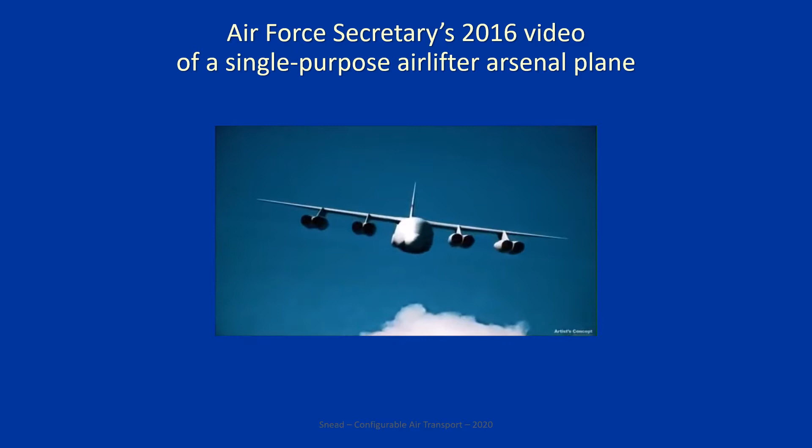In 2016, the Air Force Secretary discussed the use of an Arsenal plane to increase the Air Force's warfighting capability. While this was originally expected to be a modified existing airframe, a clean sheet design is now being considered. The CAT concept provides the ability for true Arsenal plane capabilities along with many other important peacetime and warfighting capabilities.

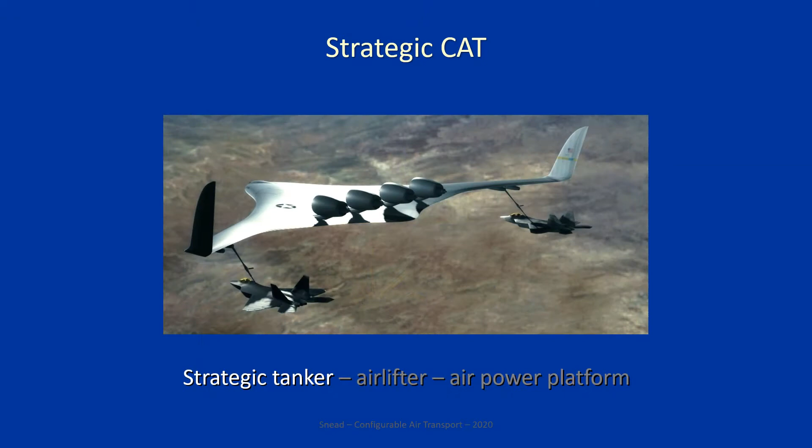The CAT concept involves three aircraft: a strategic CAT, a theater CAT, and a tactical CAT. The strategic CAT is a tanker in the class of the KC-10. Able to carry up to 3 cargo modules, each the size of a C-130 fuselage, it also is an airlifter that can also refuel other aircraft at the same time. Finally, with specialized modules, strategic CATs can perform a variety of airborne military missions.

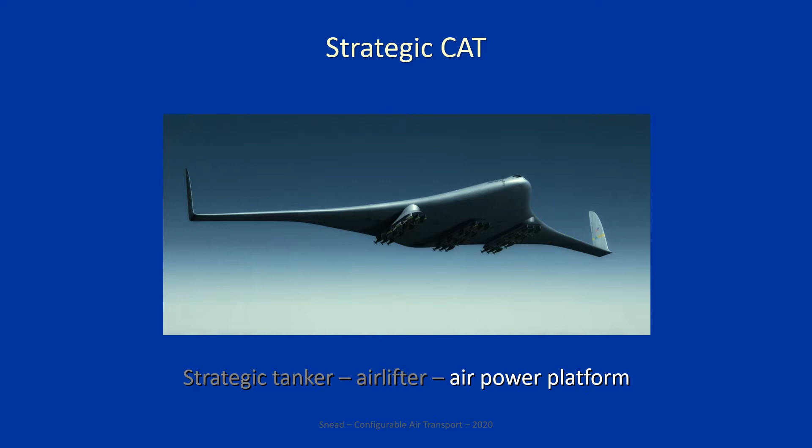The smaller theater CAT is also a tanker, in the class of the KC-46. It can carry 1 cargo module. And, like the strategic CAT, it can also carry the same specialized air power modules. The final concept is a large, tactical tilt rotor, capable of carrying the same modules.

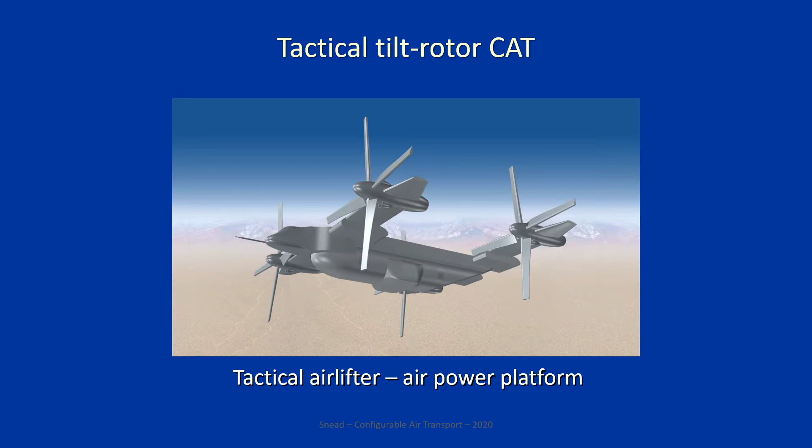The following 12-minute video, created in 2006, provides an overview of the design and capabilities of the strategic and theater CAT concepts.

The nature of modern warfare is constantly changing, and air mobility continues to grow in importance, providing critical deployment, sustainment, and other operational support for the U.S. and its allies. Air mobility modernization began with the acquisition of the C-17 and continues with the C-5M, the C-130J, and the C-130 AMP programs.

Now, the Air Force looks to modernize its air refueling capability, currently provided by a fleet of over 400 KC-135s. In the 1950s, the Air Force took a conservative approach to expanding its air refueling capability by modifying commercial aircraft into air refuelers. We have learned much about air mobility capabilities and needs over the past 50 years.

As the Air Force looks to update the capability currently provided by the KC-135 fleet, now is the time to explore the full spectrum of possible solutions that could provide effective and flexible air refueling and airlift well into the 21st century. The Configurable Air Transport, or CAT, is such a concept.

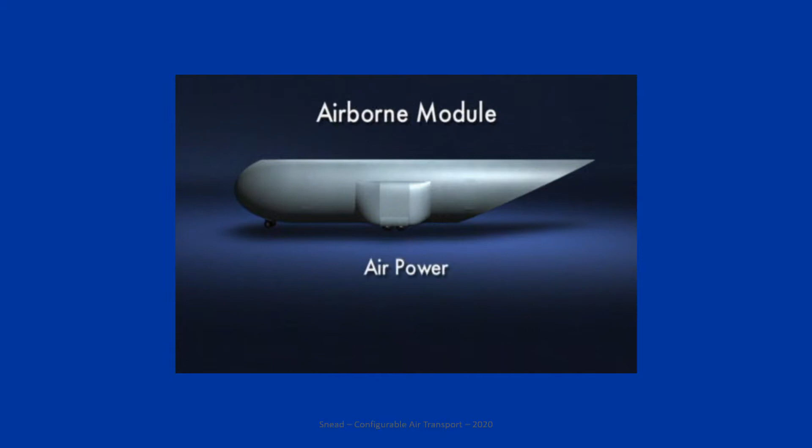The key to the success of modern shipping networks has been the standardized intermodal container and the vehicles that were designed to carry them. And this same success could be realized in today's military airlift through the use of airborne modules, enabling fast, secure, and efficient transport of cargo, vehicles, and personnel, as well as their possible use in a wide range of other air power and airborne support missions.

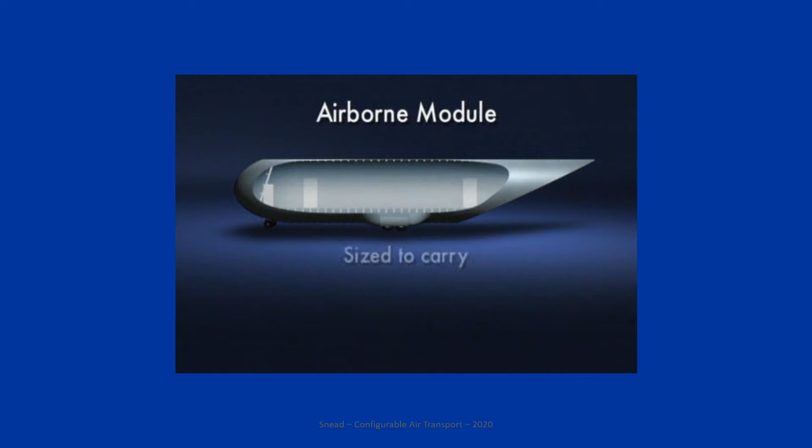Preliminary studies of module and aircraft configurations indicate that a module slightly wider and taller, but about the same length as a C-130 fuselage, could carry most Army air mobile combat vehicles and associated equipment. Specifically, the module will be sized to carry 6 463L pallets, or current and future Army air mobile combat vehicles.

The modules are designed for independent ground mobility on the ramp. The self-height adjustment of the modules enables quick loading from the ground, standard loading docks, and flatbed trucks.

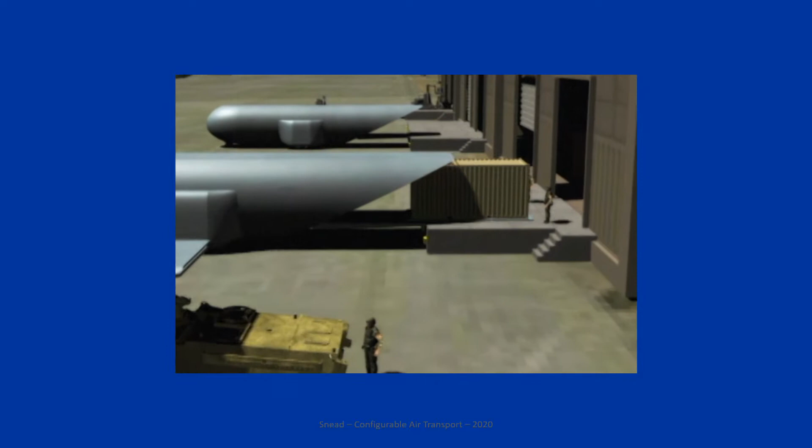Major General Gavin, commander of the Army 82nd Airborne Division during World War II, authored a history of airborne operations that included a look at desirable future capabilities. Recognizing that increasing the value of air mobile operations was closely tied to the capabilities of their air transport vehicles, General Gavin advocated modularized cargo containers and module-carrying aircraft.

This idea was picked up by Fairchild, then building the C-119 theater transport for the Air Force. To see if a module-carrying transport was practical, Fairchild built 2 prototype XC-120s based on the C-119.

In the 1930s, U.S. aircraft designer Jack Northrop pioneered a revolutionary aircraft design called the flying wing. 50 years later, in the 1980s, the Air Force used the flying wing idea to develop the revolutionary B-2 strategic bomber. Now, NASA and AFRL are investigating the next revolution in transport design, a version of the flying wing called the blended wing body, or BWB, that is aerodynamically and structurally more efficient than traditional aircraft designs.

The module-carrying version of the BWB, referred to as the Configurable Air Transport, or CAT, provides a highly versatile, time-resilient solution with the capability to provide strategic air refueling, global reach air cargo transport, global reach air power projection, and persistent airborne surveillance.

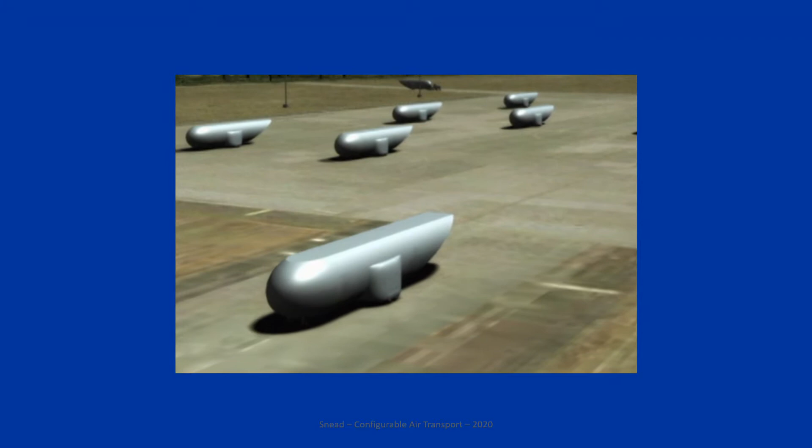The United States Transportation Command, working with the Air Force Air Mobility Command, would plan the air bridge to efficiently move the Army brigade to forward air bases. As the modules would have already been checked to ensure the cargo is properly secured and within allowable limits of weight and balance, they could be moved directly to the ramp for pickup.

Air Mobility Command strategic CATs would arrive, refuel if necessary, pick up the Army modules, and depart for regional or allied air bases near the theater of operations.

On arriving at the regional base, the strategic CATs would taxi to a designated location on the ramp, detach the modules, and depart, all in a matter of minutes. Almost immediately, the modules could be directed into position for pickup by the theater CATs, or parked away from the area of ongoing operations for temporary secure and protected storage until moved forward.

By using cargo modules, the traditional en route unloading, sorting, storage, and reloading of palletized cargo and vehicles would be replaced by the efficient movement of material and vehicles from strategic to theater air mobility systems, shaving hours and possibly even days from traditional deployment timelines.

Further, this use of airborne modules would virtually eliminate en route delays due to MOG constraints, limited material handling equipment or personnel, weather, or a lack of secure temporary cargo storage. Literally within minutes of arrival on the strategic CATs, the Army modules could be on their way to dispersed forward operating bases.

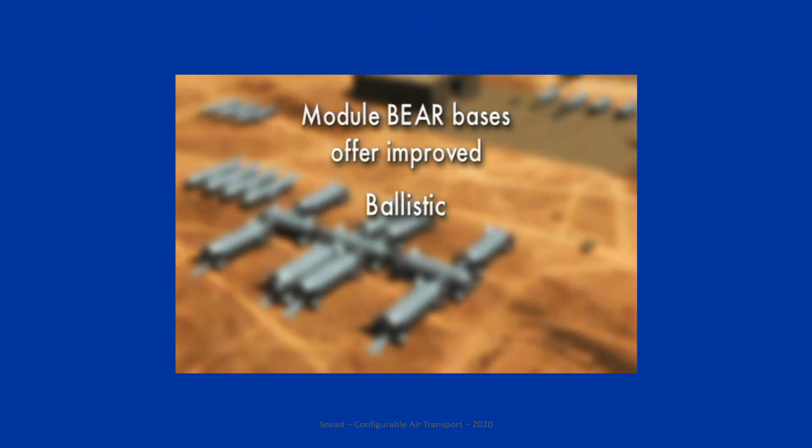Basic Expeditionary Airfield Resources, or BEAR bases, are used to temporarily station expeditionary air forces and disembark mobile land forces. BEAR-based versions of the airborne cargo modules could be used to store, transport, house, power, defend, and sustain the expeditionary forces using air-transportable, environmentally controlled facilities that provide improved ballistic, chemical, and biological protection compared with conventional tent facilities.

In an era of increasing technology utilization at all levels of military operations, BEAR-based modules provide a new means to package, deploy, and sustain high-tech equipped expeditionary forces.

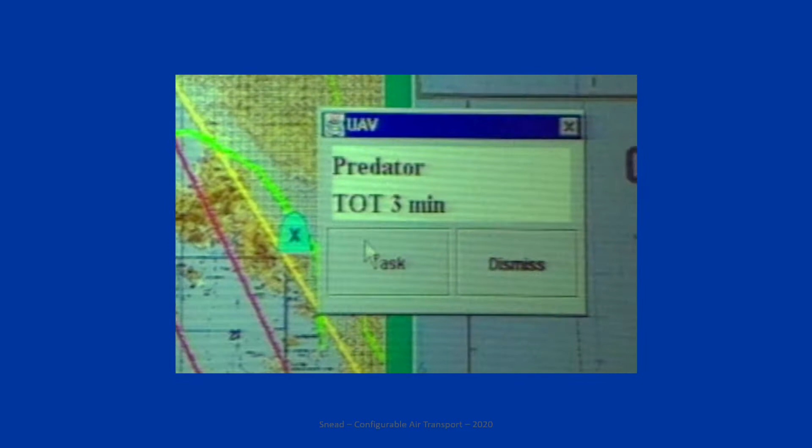For example, hospital modules could provide full emergency diagnostic, surgery, and critical care facilities. Maintenance facilities could provide problem identification and resolution capabilities while being fully electronically linked into reachback supply and expertise networks. Finally, BEAR-based modules could be readily adapted to quickly add new warfighting capabilities such as UAV and near space system control centers and new base defensive capabilities.

As the Air Force considers how best to modernize its air refueling capabilities, technology and design innovation through module-carrying aircraft could establish comparable world-leading air mobility capabilities. This would sustain critical strategic and theater air refueling capabilities and add new airlift capacity and new expeditionary forces, deployment, sustainment, airborne support, and air power projection capabilities.

Almost 40 years ago, the C-5 Galaxy introduced a new era of air mobility. Today, the innovative design application of existing and emerging aeronautical technologies could enable configurable air transports to modernize air mobility to meet the changing needs of the 21st century.

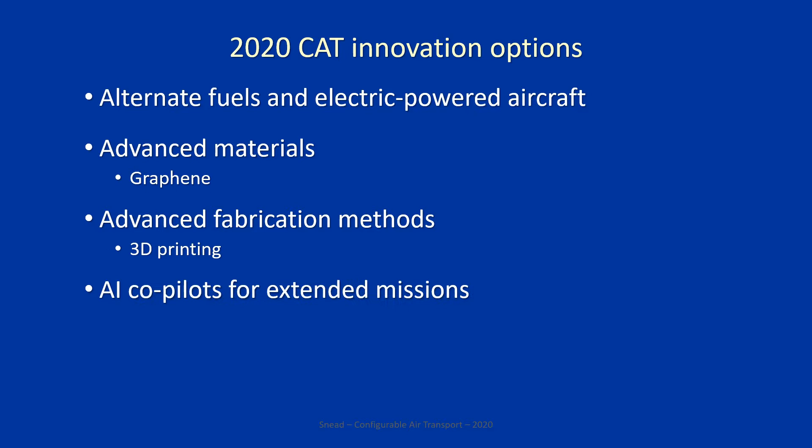Examples include alternative green fuels and electric-powered aircraft, advanced materials such as graphene, advanced manufacturing methods such as 3D printing, and the use of AI for co-piloting and mission execution. These topics are covered in this presentation.

The strategic and theater CATs are tankers. This first part discusses their performance as tankers. The need for tankers arose after World War II. The KC-97, called the Stratofreighter, was one of the Air Force's early tankers.

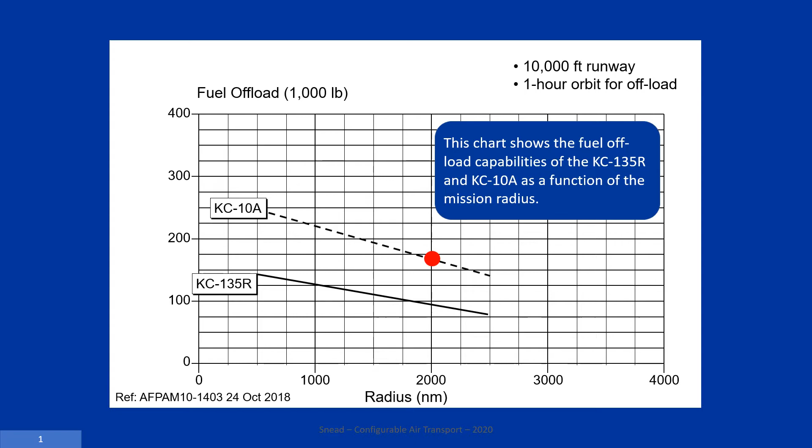The Air Force began a decades-long process of modernizing its tankers in the early 2000s. The strategic and theater CAT concepts could meet the needs of the KC-Y and KC-Z tankers. Please pause this video to examine this chart in detail.

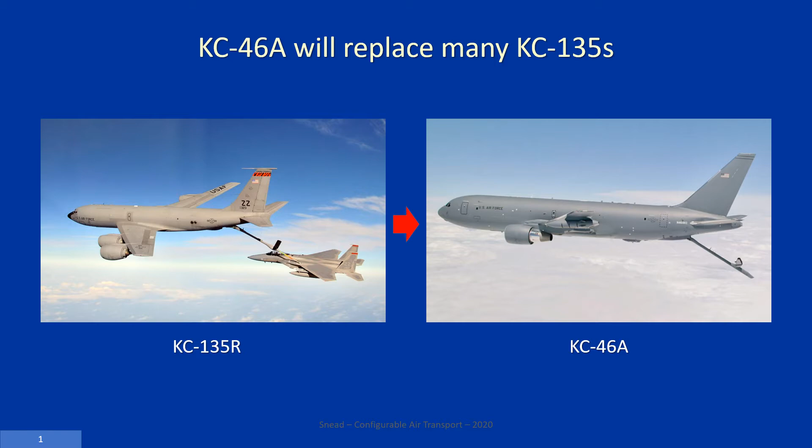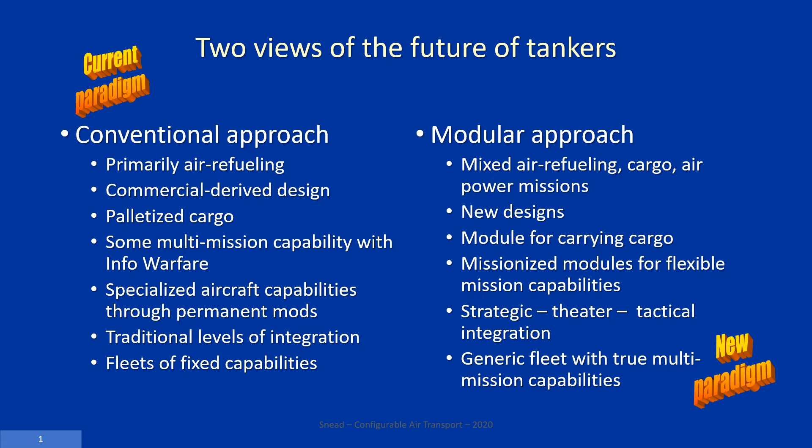According to the Air Force Tanker Modernization Roadmap, the future KC-Y tanker acquisition is intended to replace the retiring KC-10A. Since its first tankers, the Air Force has acquired tankers based on existing aircraft designs, and has followed this paradigm in acquiring the KC-46A. The CAT concept introduces a new modular paradigm, with its strategic and theater tankers having true multi-mission capabilities.

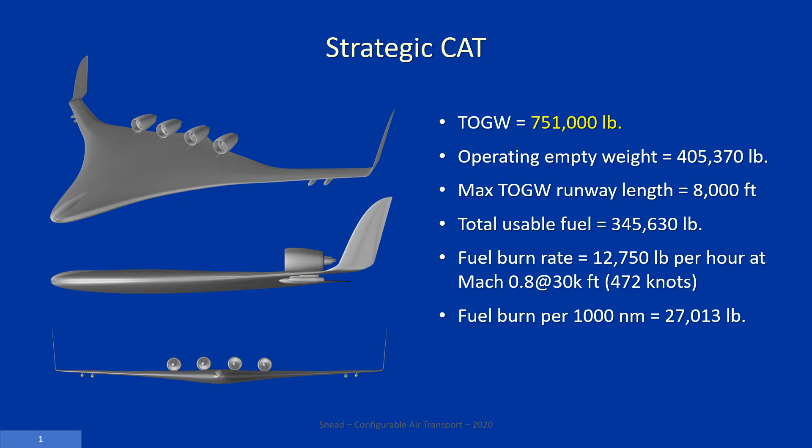The Great Circle distance from Guam to Diego Garcia is 4,500 nautical miles. This distance, with a 600 nautical mile margin, was selected as the sizing point for the strategic CAT. The 600 nautical mile margin represents weather and overflight margins.

These next two charts show the details used in estimating the strategic CAT fuel offload needed for this F-22 ferry mission.

Strategic CATs have the range and offload capacity to support global strategic power projection missions.

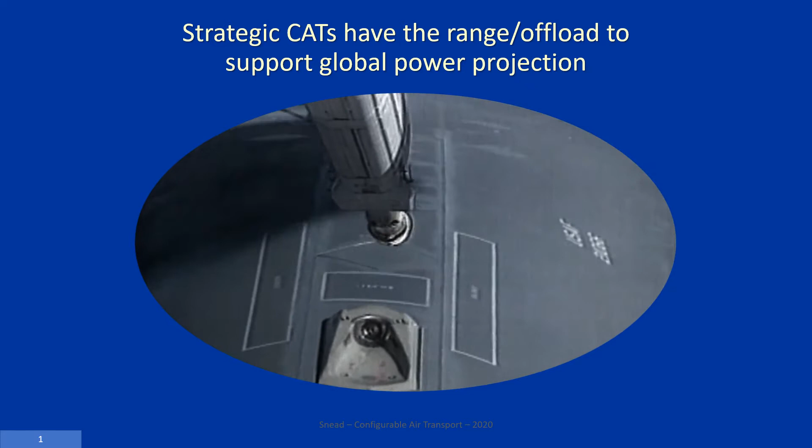Now, let's look at the tanker capabilities of the theater CAT. Here are the tanker characteristics of the sized theater CAT.

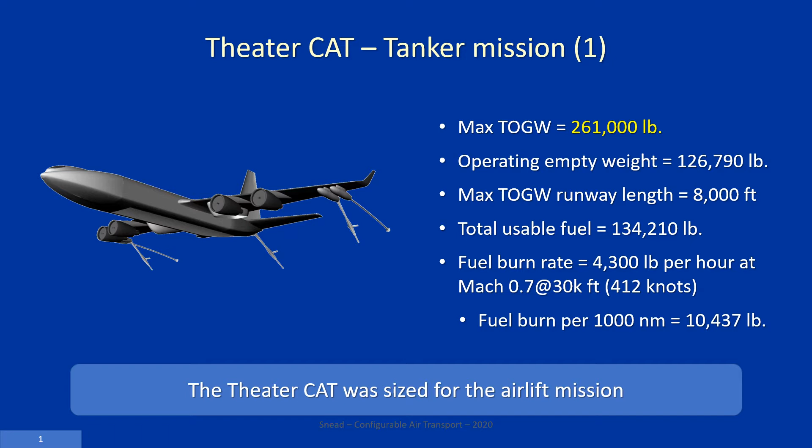Note that the Theater CAT would augment the KC-46A by giving the theater commander a deployable tanker with substantial multi-mission capabilities.

This part discusses the conceptual design of the common cabin used in these two aircraft. To enhance their multi-mission capabilities, both the strategic and theater CATs would be designed for extended airborne missions, perhaps up to 5 days.

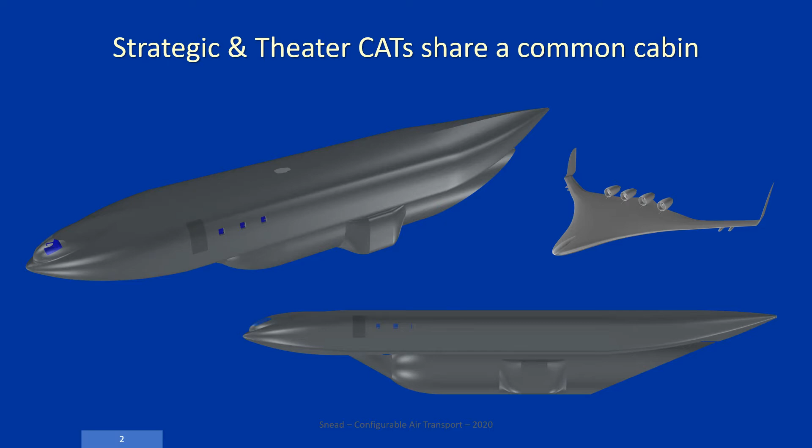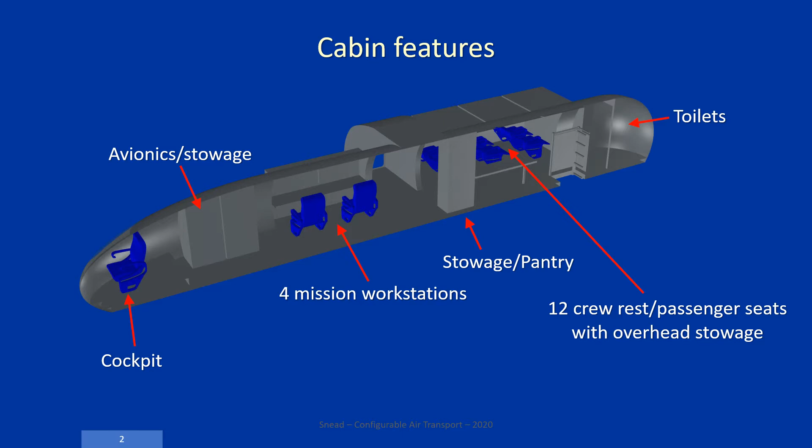The cabins of the two aircraft would likely be similar, if not nearly identical in arrangement. The cabin is designed for 4 mission workstations and 12 passengers. The passenger seats also provide crew rest accommodations for extended missions. Access to the module, being carried by the Theater CAT, is provided at the aft of the cabin.

This part examines the airlift performance of the strategic and theater CATs. In the 1960s, the Air Force adopted a standardized cargo pallet, referred to as a 463L pallet, to improve air cargo transportation efficiencies. Air Force airlift aircraft incorporate provisions to load and restrain these pallets during flight.

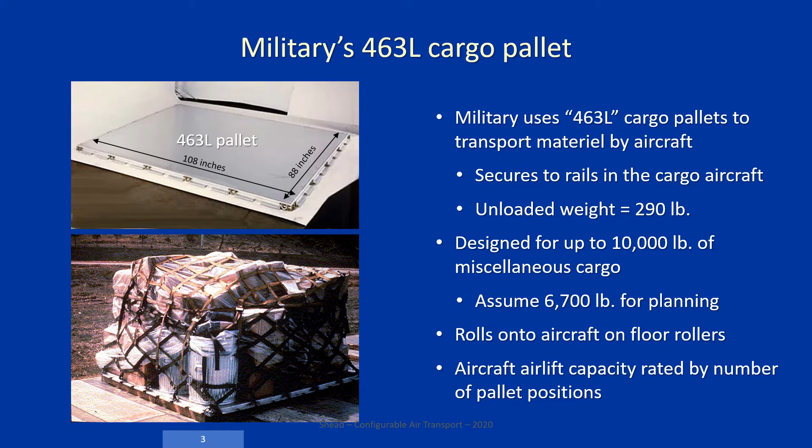Besides the C-17, the KC-46A and the KC-10A have airlift capabilities that will be used for comparison.

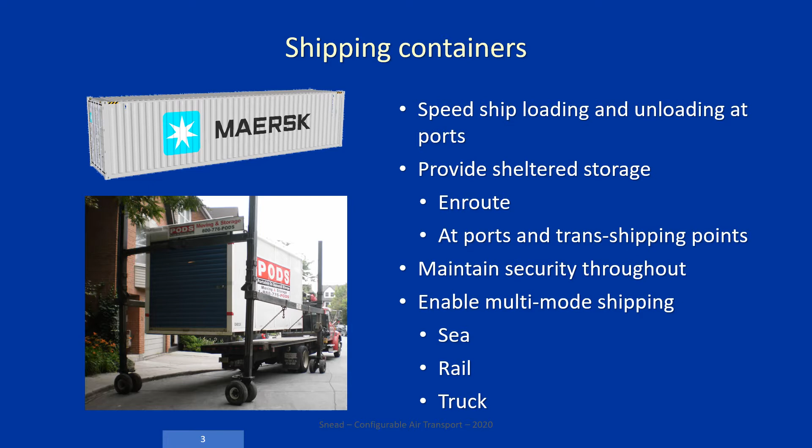Shipping by container has revolutionized cargo transport and management. Containers speed loading and unloading, provide sheltered storage with security, and enable multi-mode transport. Specialized containers provide missionized capabilities, while retaining the benefits of using containers with common interfaces.

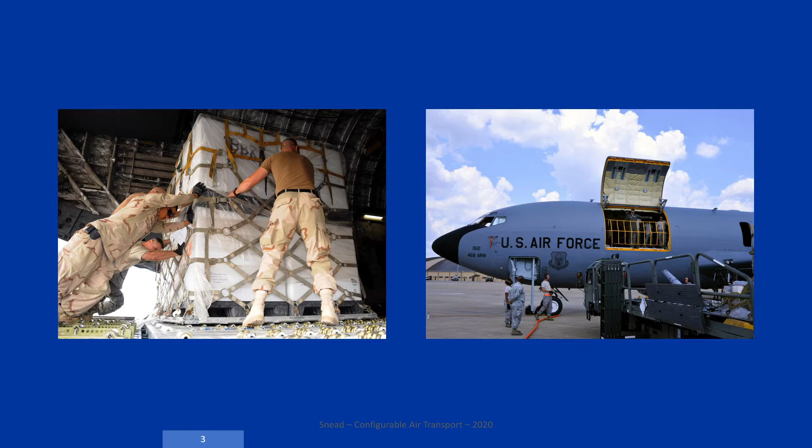The container revolution has not yet reached military airlift. To move containers by military airlift, they must be attached to 463L pallets. This is a time-consuming process. CATs bring the benefits of shipping containers to airlift.

General James "Jumpin' Jim" Gavin commanded the 82nd Airborne into Normandy. After the war he published the book, Airborne Warfare. In the book, General Gavin proposed the use of airborne modules.

After World War II, the C-119 was built for theater airlift. A modified C-119, called the XC-120, was built to test Gavin's idea of a module carrying airlifter.

At Hagerstown, Maryland, the U.S. Air Force demonstrates its latest cargo plane. This is the Fairchild XC-120, a pack carrier plane with a detachable fuselage.

Doors are designed like clamshells.

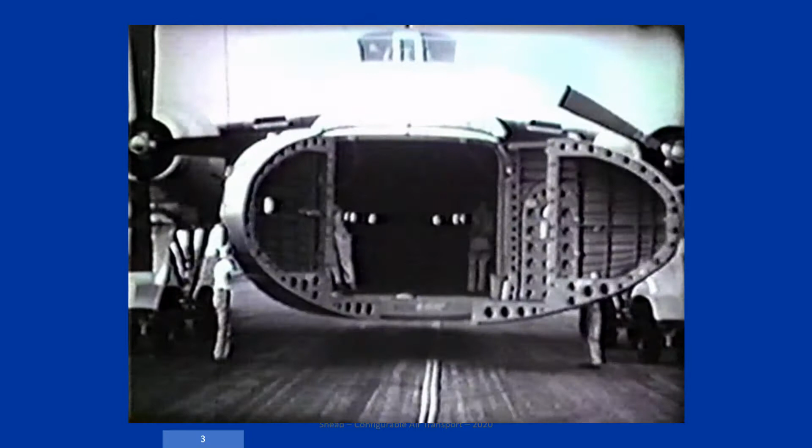Cargo capacity is 20,000 pounds. It carries 64 combat-equipped troops or 36 litter patients with 4 attendants.

The pack has detachable wheels. 4 electric drum hoists raise and lower the pack from the carrier.

A central control operates the release and locking mechanism, and the pack lowers to its own wheels. Then the hoist lines are detached.

The five-man crew of the carrier consists of pilot, co-pilot, radio operator, navigator, and engineer. When the pack is separated from the carrier, it is easily towed away.

This pack can be used to house various types of shops, headquarters units, emergency hospitals, weather stations. It can also be converted into a tanker for carrying fuel.

Ball socket connections lock the pack to the carrier. A rubber tubing seals the pack to the carrier using compressed air.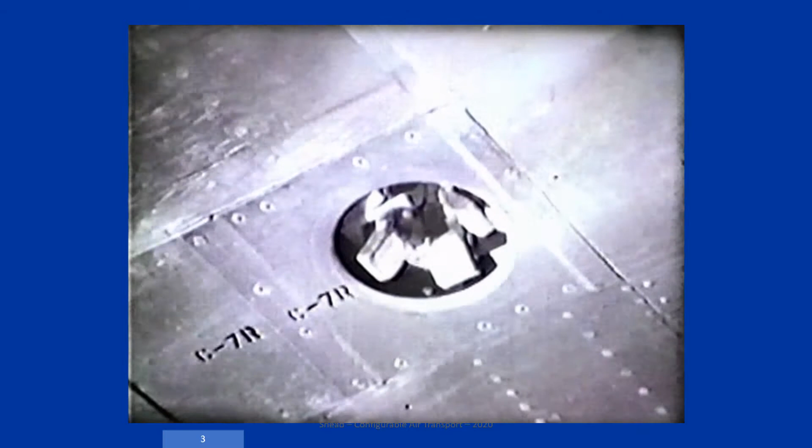The carrier is powered by two Pratt & Whitney engines with reversible pitch propellers. The maximum speed is 250 miles per hour, and the ceiling is 25,000 feet.

The landing gear consists of four retractable dual wheel units. It's electrically operated, and the main or rear wheels have brakes.

This airplane opens a new field for aviation. The cargo pack is to aircraft what the trailer is to highway trucks.

The C-130 is the military's theater airlifter. It was first acquired in the 1950s. It takes about 2 hours to onload or offload cargo from the C-130, and it can carry up to 42,000 pounds of cargo.

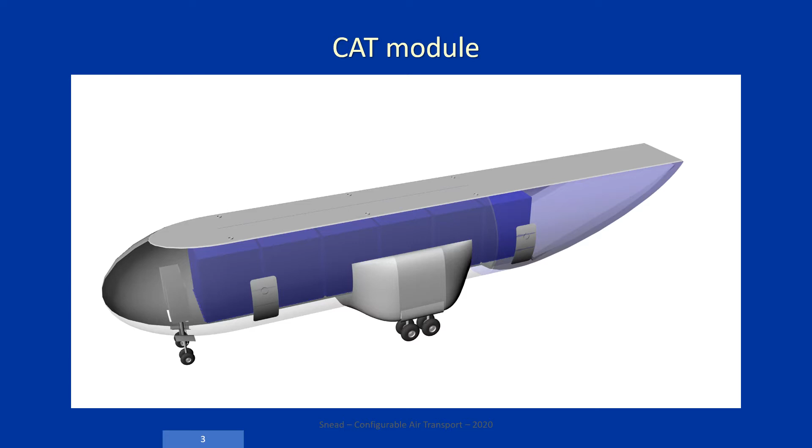The CAT module is about the same length as the C-130 fuselage, but a little taller and wider. Like the C-130H or J models, the CAT module can carry 463L pallets. The average cargo load would be about 40,000 pounds, while the maximum would be 52,600 pounds.

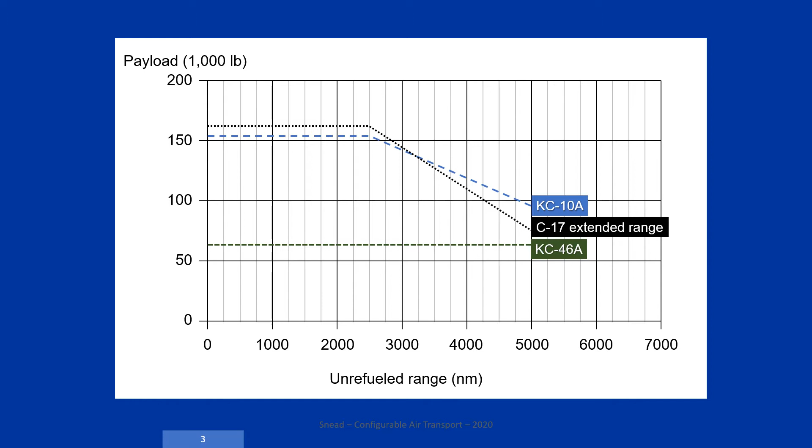We will compare the strategic CAT's airlift performance, in terms of payload versus range, against three airlifters, starting with the strategic CAT carrying up to 3 modules, each with a maximum of 52,600 pounds.

These are the results for the average 40,000-pound module loads.

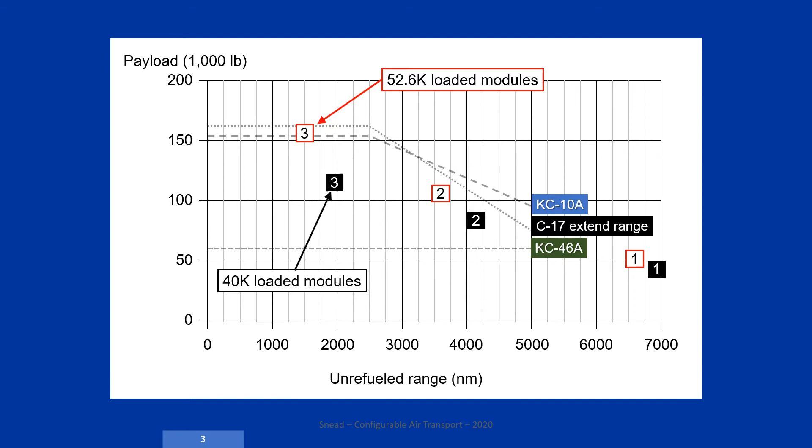The C-5 and C-17 would still be used for oversize payloads, while the strategic CAT would extend their service lives, while also providing tanker and multi-mission capabilities, including being a true arsenal plane.

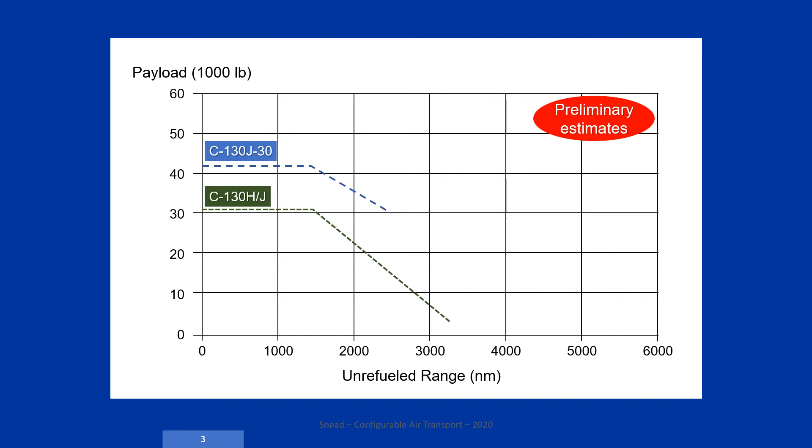Now let's compare the C-130 with the theater CAT carrying a single module. Here are the payload range curves for the C-130s. The theater CAT has modestly better payload range performance than all C-130 versions.

Let's summarize the CAT airlift capabilities. With all of the emphasis on the CAT's use of modules, let's go over their key design characteristics.

Most modules would have solar arrays to keep key avionics and communication capabilities powered, while also powering the drive motors, ramps, etc.

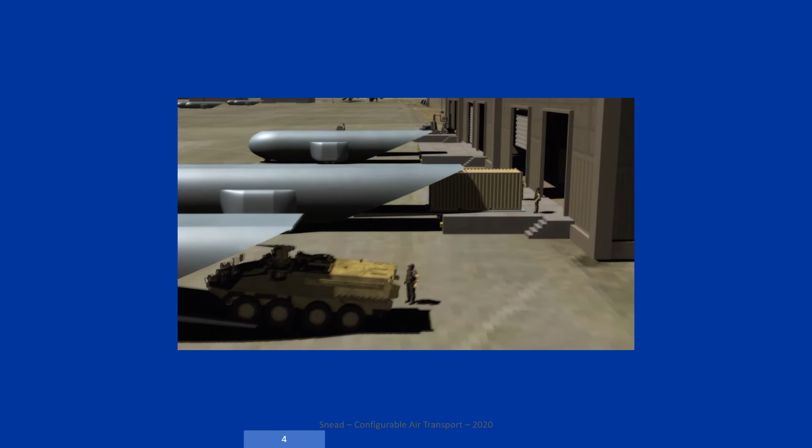A key feature of the module is that loading and unloading can be done off the flight line, reducing congestion. Wheeled and tracked vehicles can be loaded directly, while loading docks can be used to load conventional cargo.

Loaded modules, already weight and balance checked, can be towed to a secure holding area to await loading onto CATs. To prepare for loading, the modules, under their own power, are directed to the flight line.

Where they are picked up by a designated CAT, it's possible that the CAT would depart within 30 minutes of arriving without needing to stop its engines.

When modules must be moved forward to smaller airfields, theater CATs self-deploy to regional bases. The strategic CATs deliver the modules to the regional bases.

Engines running, the modules are released on the flight line and the strategic CAT leaves to minimize congestion. Under their own power, the modules are moved to await the arrival of the theater CATs.

The modules provide a basic level of security and protection of the cargo. The theater CATs pick up modules on the flight line without the need to unload and reload aircraft, then quickly depart to transport the modules forward.

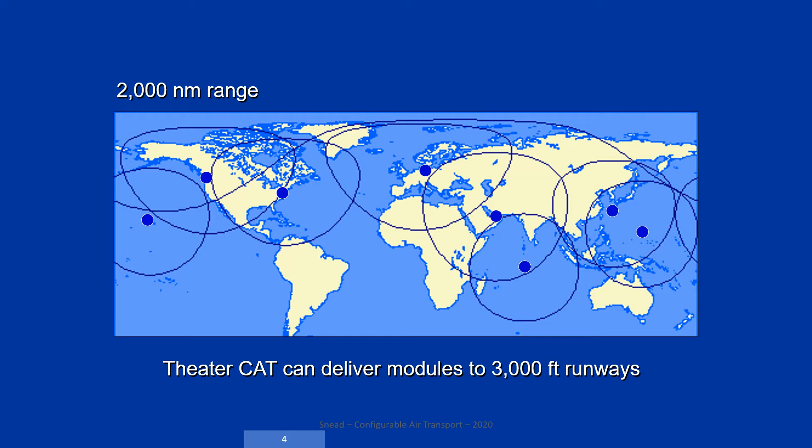With its 2,000 nautical mile range, the theater CATs can deliver modules quickly worldwide. Tactical tilt rotor CATs can then move the modules the final miles to where needed.

Literally, the CATs can pick up a module from almost anywhere in the world and deliver that module almost anywhere it is needed, quickly and efficiently, while keeping the cargo secure.

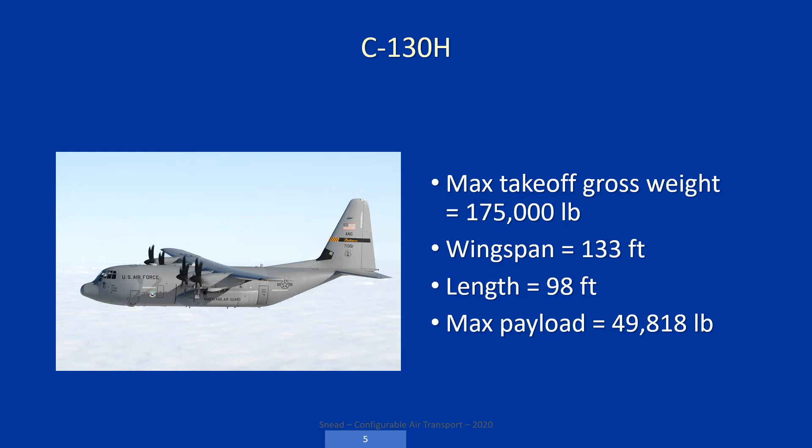Having mentioned the tactical tilt rotor CAT, let's briefly discuss this concept. The tactical CAT would essentially be a C-130 with a vertical takeoff and landing capability. A tiltrotor of this size has been studied.

Unlike the strategic and theater CATs, which were sized aircraft, the tiltrotor CAT is still a notional design. The intent is to show how a module would be integrated.

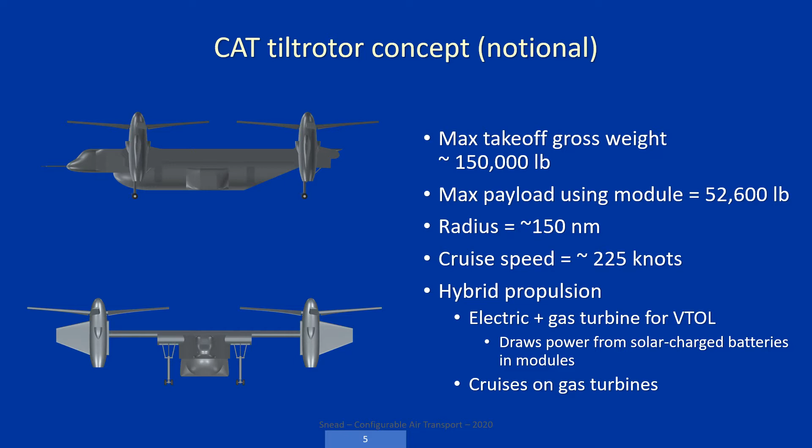These are notional weight and performance values. Advances in electric-powered aircraft could be incorporated into this design. Besides CAT modules, the tactical CAT would also be able to transport other heavy payloads.

As you have probably noted, the CATs use a long landing gear to enable the modules to be carried. The B-58 was a Mach 2 supersonic bomber developed in the 1950s.

It used a large centerline fuel pod that would be jettisoned. The B-58 required long landing gear to enable the fuel pod to be carried. The CATs use this proven landing gear geometry to provide the height needed to load and unload the modules.

A substantial advantage of using modules is the ability to missionize modules to replace retiring aircraft or add new capabilities, not just for the military but also for civil and commercial uses.

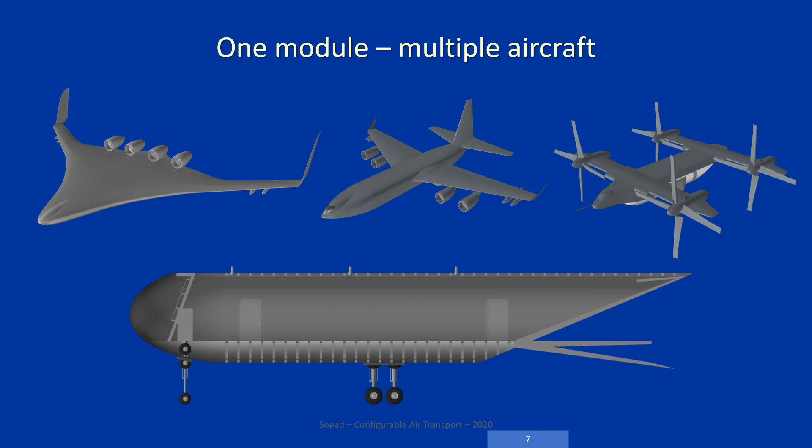Moving from specialized aircraft to missionized modules on strategic and theater CATs would substantially reduce maintenance and flight crew training costs, while also enabling a diversity of missions that is unaffordable when using special-purpose aircraft.

In lower threat environments or from standoff distances, CATs can perform many airpower missions when carrying combat modules. Loading munitions and servicing the combat modules would not require the presence of the CAT aircraft. Munition modules, equipped with rotary launchers, can be used.

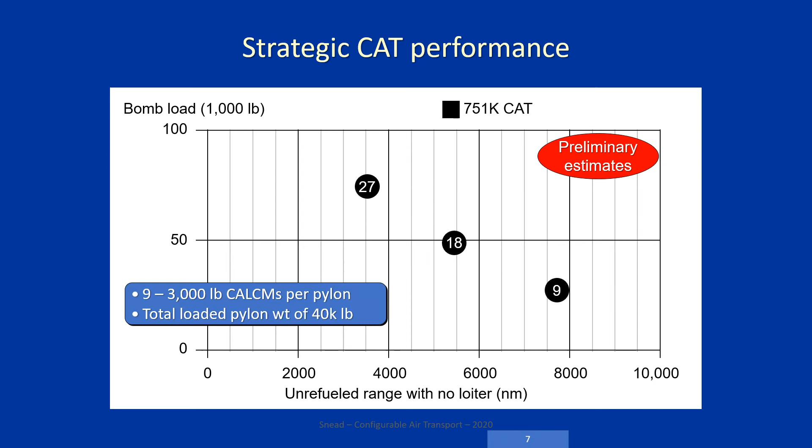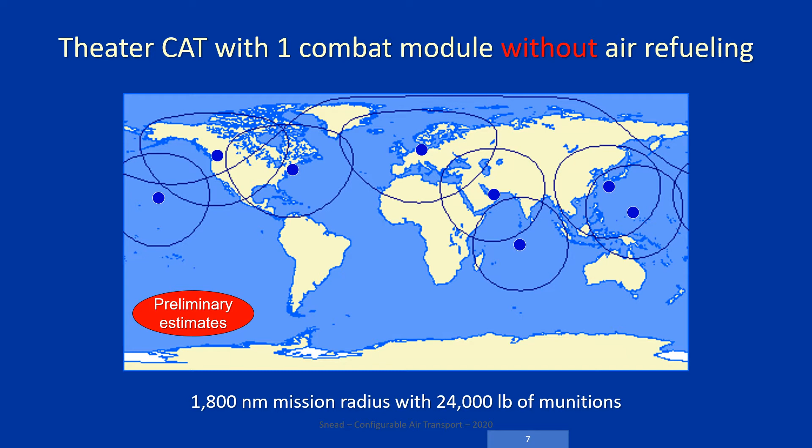And, if the Air Force does retire the B-1, then the theater CAT, with its large payload capability, long endurance, and its design for persistent missions, would be a replacement for ground forces support, mine laying, and other non-nuclear missions that the B-1 undertook.

Maintaining unique combat capabilities, such as modified electronic warfare aircraft, are increasingly cost-prohibitive. Strategic and theater CATs could carry a much wider range of such special-purpose modules, without costly airframe modification programs.

Combat drones are increasingly being used by the U.S. military. However, land and sea forward basing is increasingly difficult, as the anti-access missile threat continues to grow. Using missionized CAT modules, armed combat drones can be air-based, operating from loitering strategic CATs.

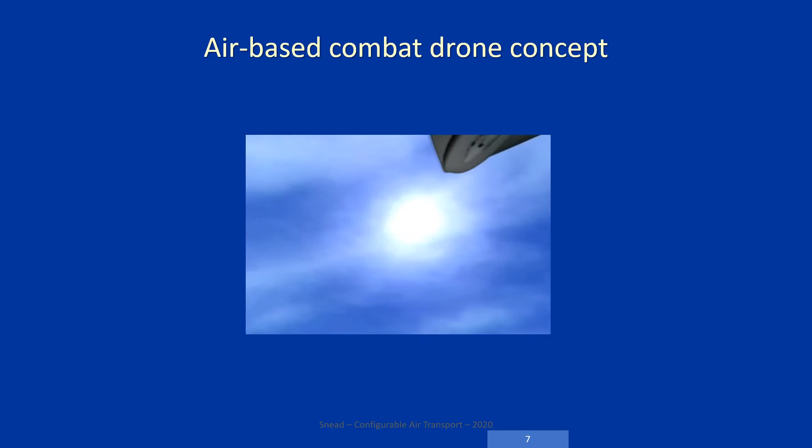This video, developed using an earlier strategic CAT design, illustrates how such a combat drone could be rearmed and refueled using a drone tender module.

Let's look at a scenario to illustrate how air-based combat drones could be used. Using the Alaska landmass as an example, the mission is to air-base combat drones 250 nautical miles off the coast and conduct intelligence, surveillance, and strike missions. Carrier-based F-35s would provide protective combat air patrols.

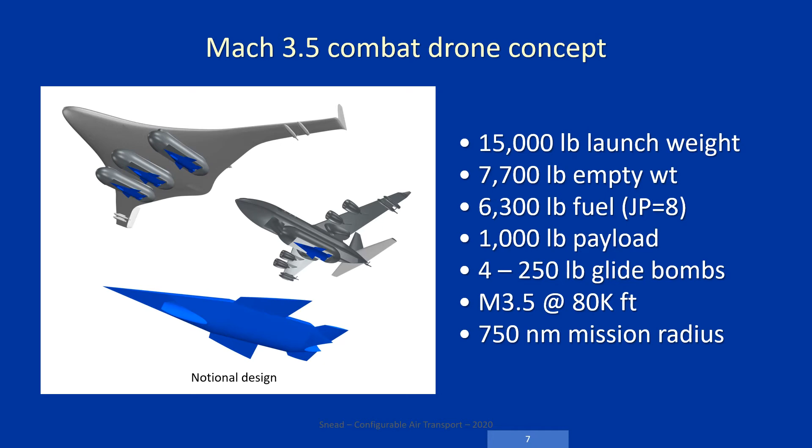The drone is envisioned as a high-altitude, Mach 3.5 unmanned vehicle with these design parameters, based on a preliminary analysis. This would be a typical flight path for the drone. The drone would use both radar and electro-optical sensors to gather intelligence and conduct surveillance.

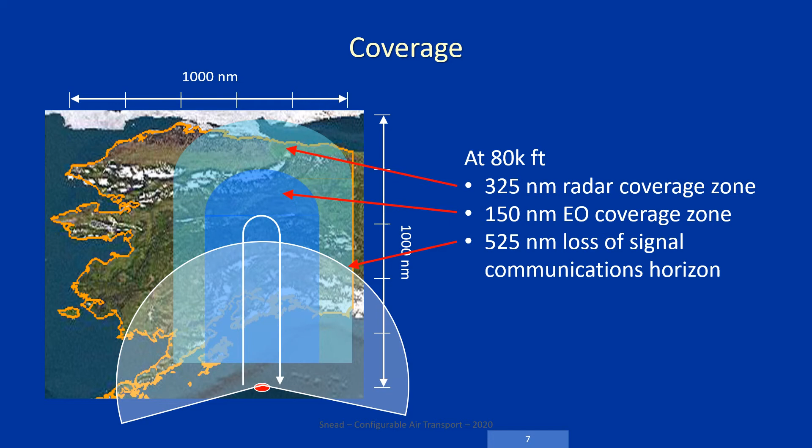This is the baseline drone mission profile. The drone conducts a U-shaped mission covering 1,820 nautical miles. Along this flight path, the sensors can record over 9,000 square miles of surveillance data within a broad area of nearly 600,000 square miles.

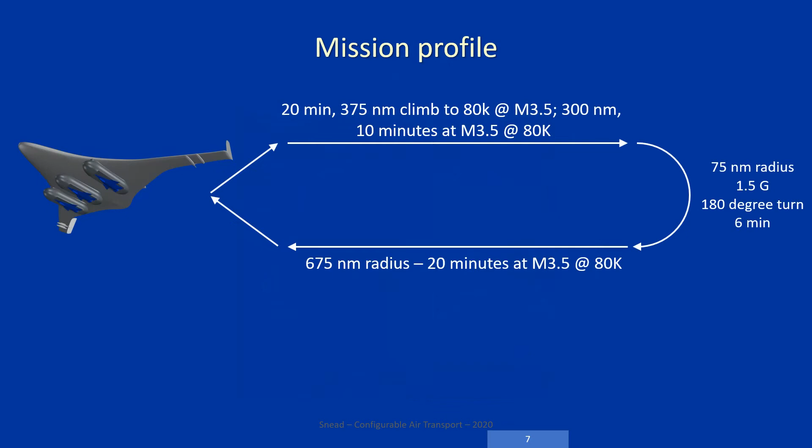In total, 5 strategic CATs would be required for 24 hours of operation. 2 CATs, separated by up to 1,800 miles, could also pass the drones between them. Of course, F-35s would also be used for attacking targets identified by the drones.

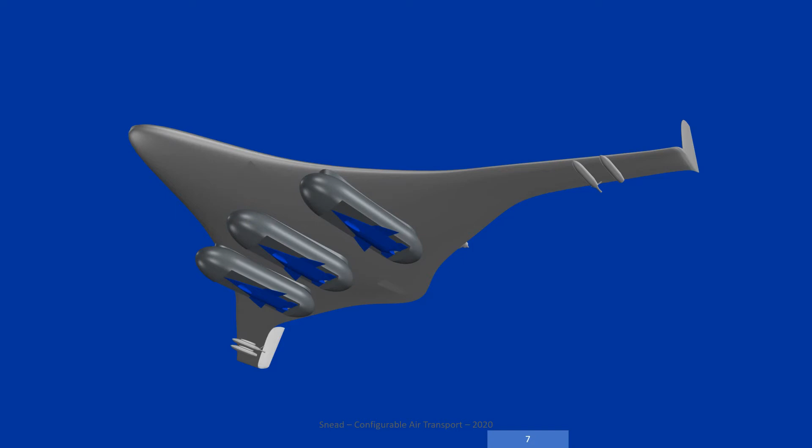CATs equipped with combat drone tenders illustrate the value of sustained airborne operations.

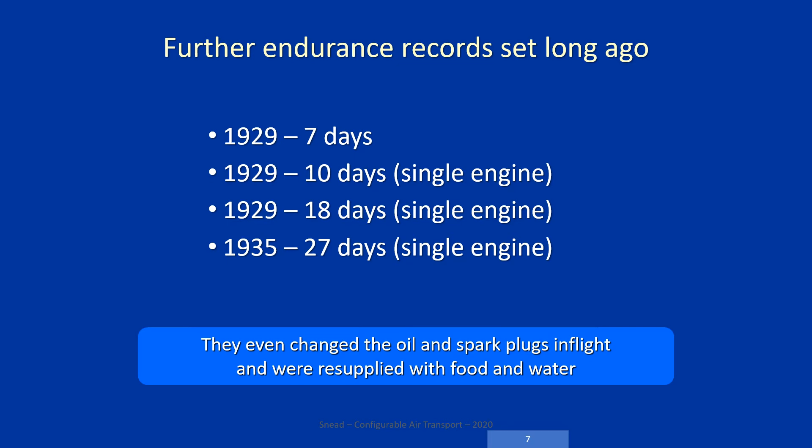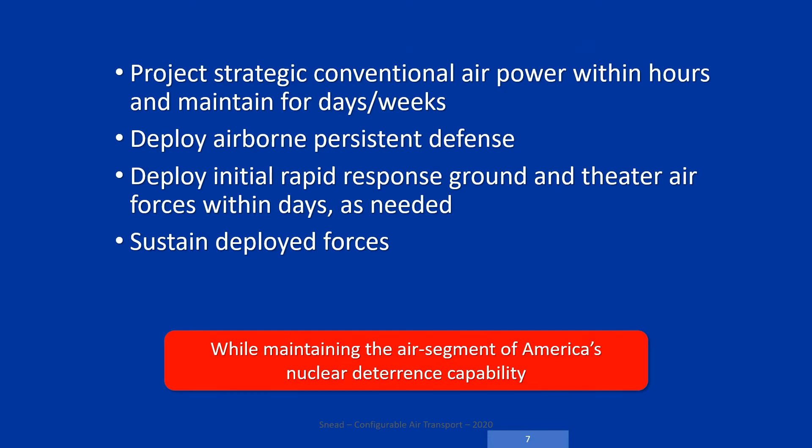History shows that the warning time of major military crises is often short or non-existent. Yet, the Air Force must be able to respond. Equipping theater and strategic CATs with offensive and defensive combat modules enables air battle groups to be deployed quickly.

We will now focus on understanding the operational benefits of using modules, starting with cargo loading and unloading. During times of crisis, the aircraft utilization rate determines how many aircraft and how much time is needed to move cargo forward.

Passenger airliners have turnaround times under 1 hour. This is done to minimize the needed fleet size and required ramp space, and maximize revenue. Unlike flight crews, aircraft do not need to rest.

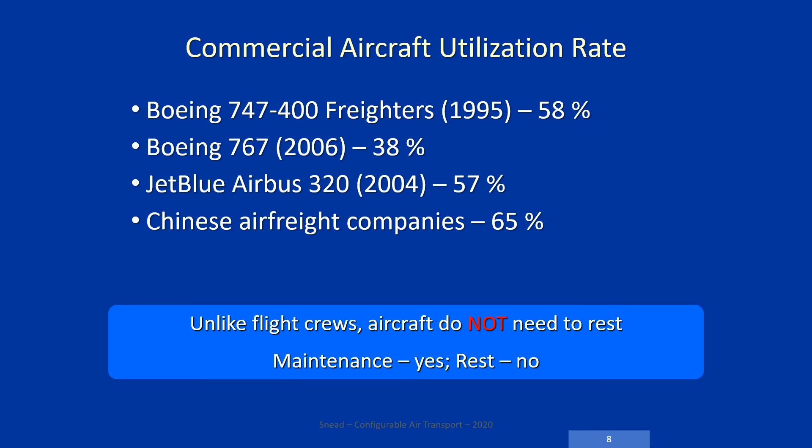In times of crisis, high utilization rates are needed. The key to increasing the utilization rate, the time actually flying, is to load and unload cargo faster.

Due to their design, converted commercial airliners take longer to load and unload cargo. For military cargo aircraft, loading and unloading is done on the ramp, creating congestion and often requiring specialized equipment. Specialized cargo handling equipment must often be transported first to unload pallets.

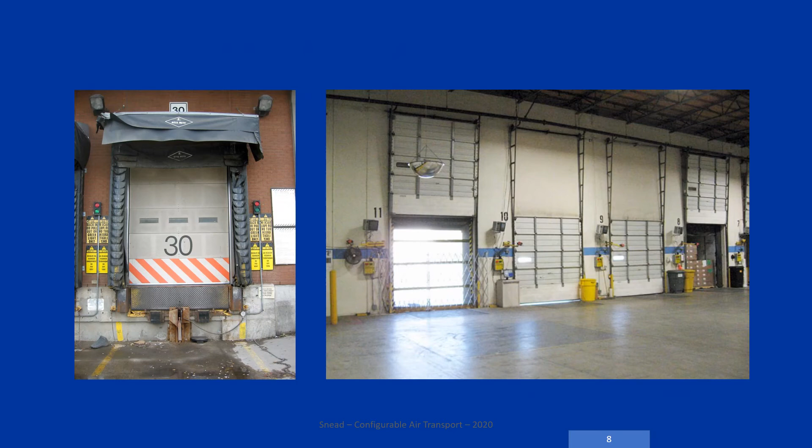Traditional loading docks are designed to enable quick loading and unloading of truck trailers. CAT modules can be backed right up to standard height loading docks and loaded just like a truck trailer. This enables module loads to be assembled, checked, and secured until loaded onto a module, keeping the cargo protected and secure until it's unloaded at its final destination.

The United States responds to a natural disaster in distant Nepal. For such emergencies, preloaded modules would be stockpiled at U.S. and Allied bases around the world, speeding the response when time is critical. The mission is to deploy 800 tons of supplies from Wheeler-Sack Army Airfield in New York to Nepal by way of Spain and the United Arab Emirates in the Persian Gulf.

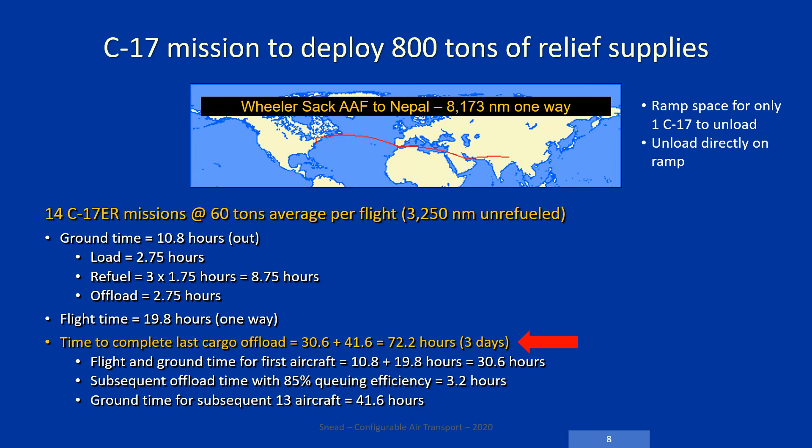Once the modules are released, as the CAT taxis to depart, under their own power, the modules would be guided off the flight line for storage or unloading. For this analysis, a conservative offload time of 30 minutes and a load time of 60 minutes are used.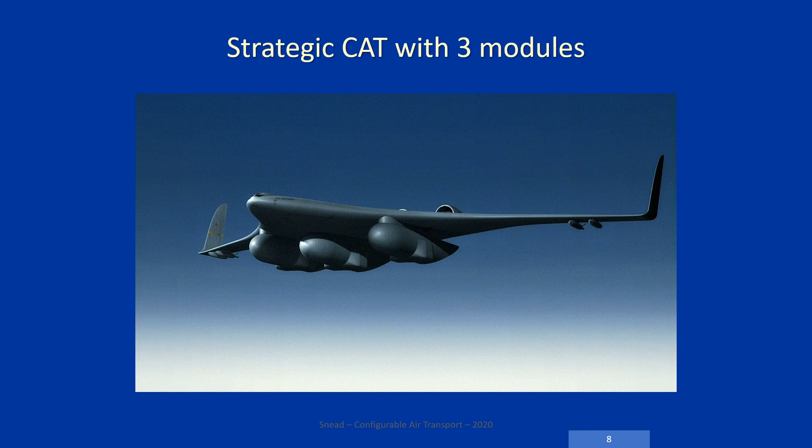For the second CAT analysis, 3 modules will be used. Also, air refueling will be used to fly directly to and from Nepal using the same air route. Here are the results for the 3-module strategic CAT analysis. The final delivery would be completed in just over 1 day.

Now we can compare the results. The extended range C-17 would require 3 days. The KC-46A would take nearly 6 days. With using just 2 modules, the strategic CAT would take about a day and a half. Finally, with using 3 modules and air refueling to speed delivery, the strategic CAT would take slightly over 1 day.

Air refueling could also be used when intermediate bases were not immediately available. With either 2 or 3 modules, the strategic CAT outperforms the C-17 and the KC-46A, especially the latter. Of course, this advantage would also apply to the rapid deployment of U.S. combat forces.

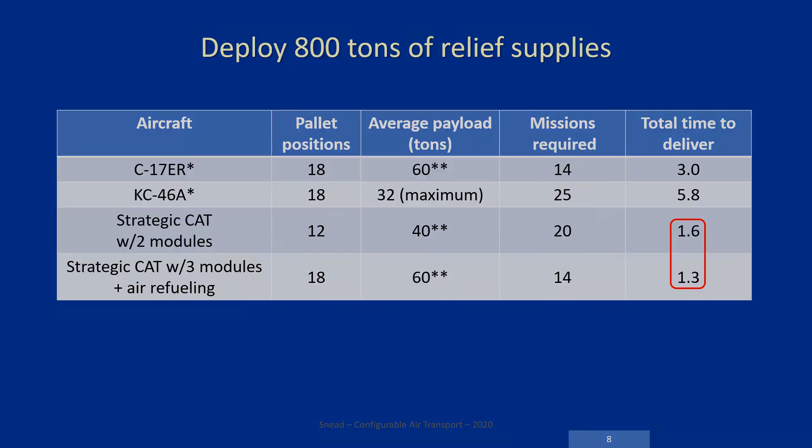All patients can be preloaded in the module prior to being connected to the aircraft, preventing the aircraft from being on the ramp during the time the patients are being loaded and prepared for flight.

The use of medical evacuation modules provides an increased level of medical support without permanently committing transport aircraft to this mission. These modules would be designed to transport critical care patients, such as patients with burns and battle injuries, and patients requiring specialized isolation such as those exposed to chemical, biological, or nuclear agents.

In such cases, the module would be isolated from the CAT and the entire module can be cleaned and sterilized. And by using the tactical CAT, such modules can be transported forward to where they are needed.

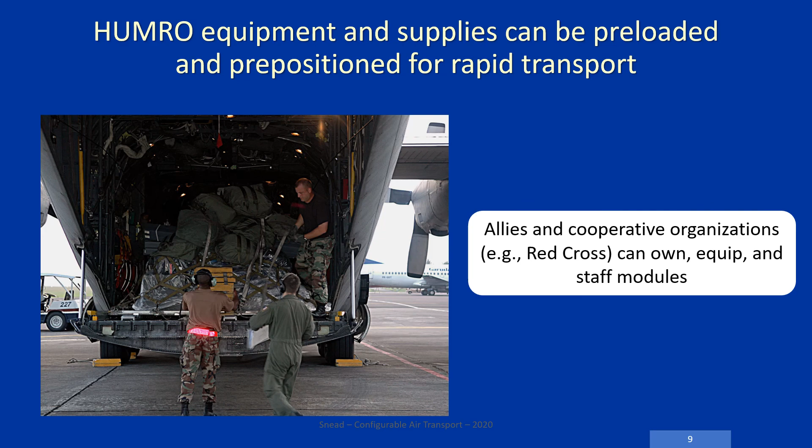One way to think of all of this is that the modules are apps being used by a common set of aircraft. These next 2 charts summarize the advantages of using modules.

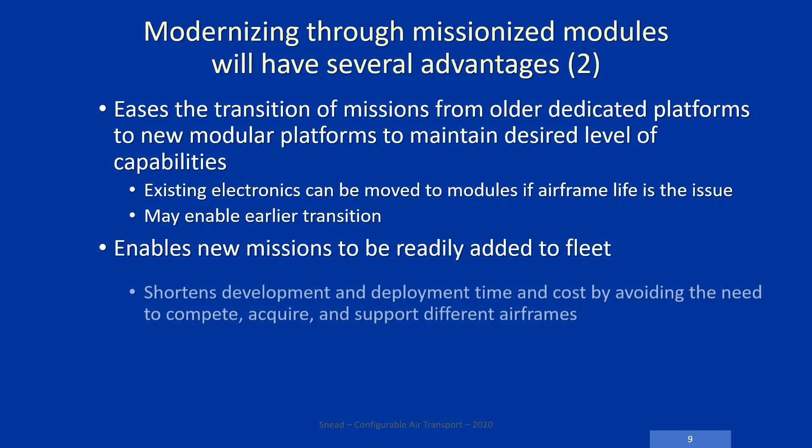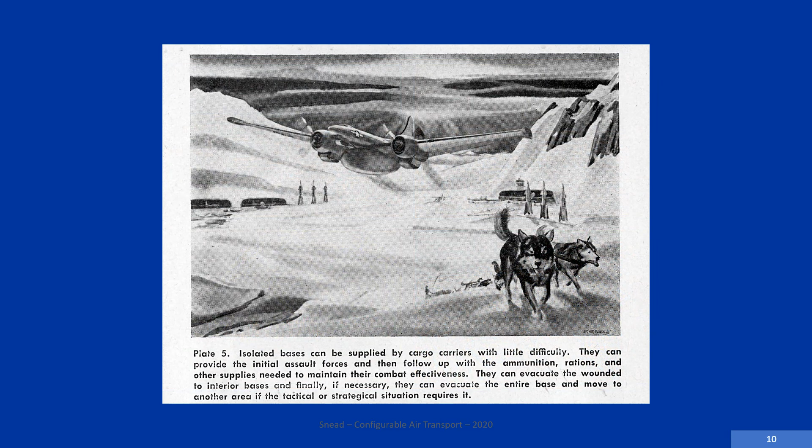In Part 10, the use of missionized modules for building and supporting advanced forward bases is discussed. U.S. military forces, in times of crisis, require the construction of temporary advanced bases. 70 years ago, General Gavin anticipated the use of air-delivered modules for building and supplying forward bases. With many expeditionary missions lasting months, even years, CAT modules enable more secure bases to be quickly built.